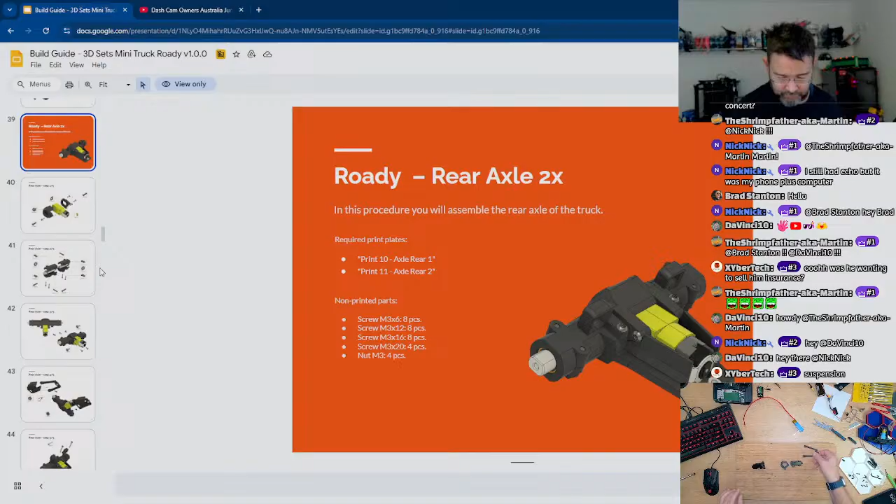Now let's just bring up that one for a moment, just showing you guys to make sure we're all on the same page. This wishbone, for lack of a better description, doesn't have this sticky outy bit on it. So that's what makes them different. Other than that, they're basically an identical build.

So let's go to here. And Chrome, there we go. You should be able to see top down, and you should be able to see me. Sooner or later I'll probably drag in the other camera, but I don't want to mess with it on stream because things then blow up. We know that goes that way up because I'm using the other one as a reference.

Now, I quickly put all this together off stream because we've already seen this, so I didn't want to slow things down any more than we had to with this part of the assembly process. Just making sure that the tongue on the motor fits into the tongue where the axle is, because the axle is already installed.

Next, we need to put the other half of the motor shell into place and screw it together. We need a whole bunch of M3x12s. Jecks is spamming because he wants number 1 apparently. 1, 2, 3, 4 M3x12s. And a screwdriver would probably be a good idea.

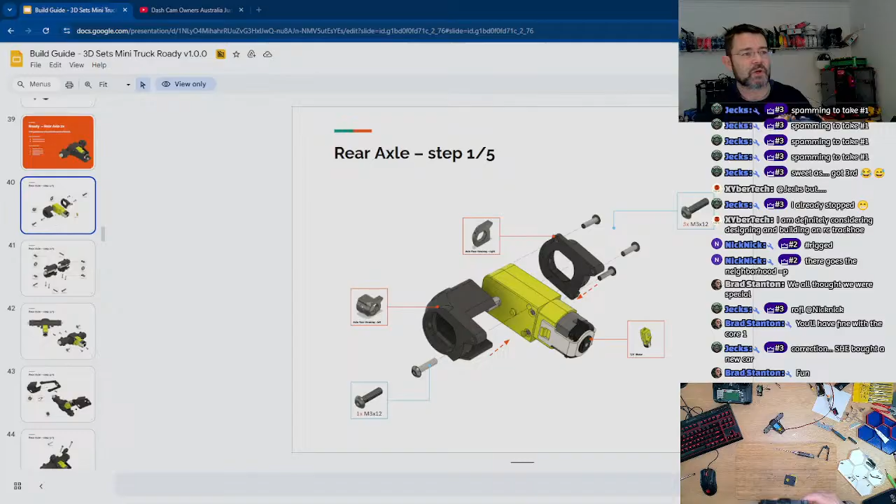Need that and that. So what's going on? I have these are the axles going through the middle that connect to the motor. I need to make sure that this housing is pushed in just as much as this housing, and it's an exceedingly tight fit because it needs to be.

So what I need to do is prop this up high enough and support it well enough to be able to really lean on it with a lot of weight and press it into place. That's not really going in as well as I would like.

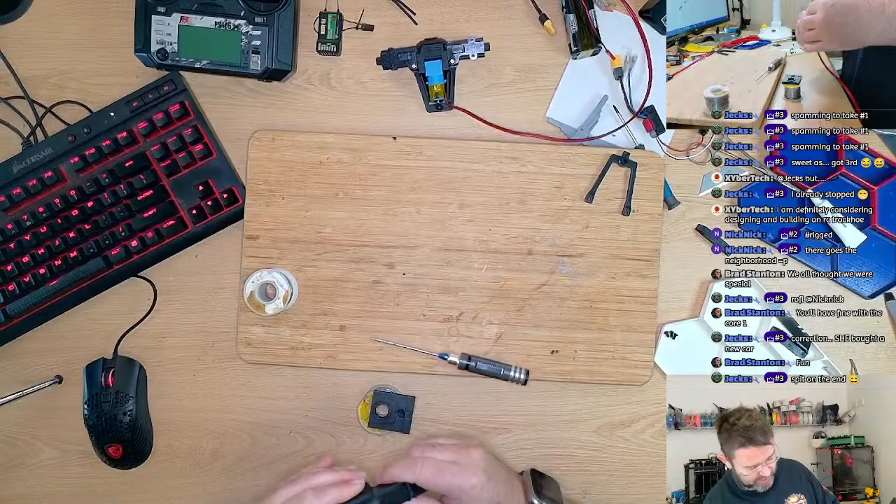I have another one of these printed out pieces I can use to whack it with. It's somewhere, I just have to go by hand for a minute. Let's move that out of the way. Making progress - this is the side that's being pressed in, that's the normal side.

Split on the end, dude! You can always spot the Aussies in chat, they'll be the crudest. And Jecks in particular will hold that standard for us, won't you Jecks? Yeah, Martin gets around Jecks, didn't you know that?

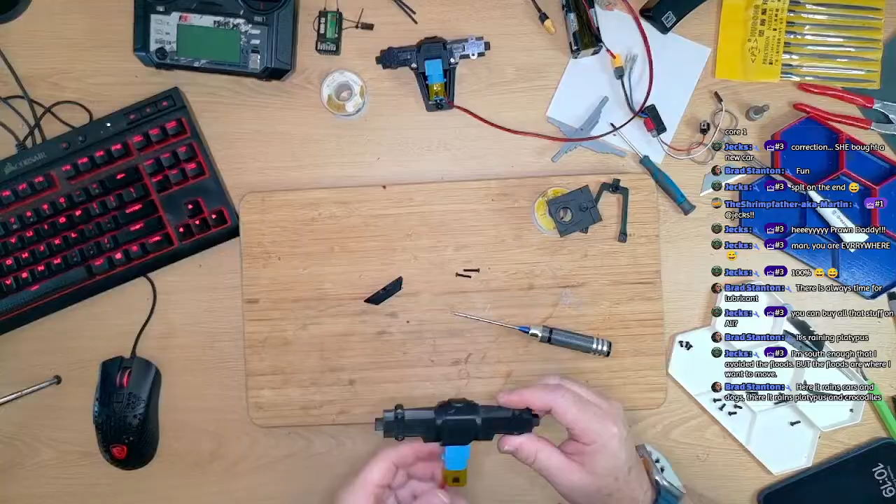Why would you want to move to a flood zone, Jecks? So just showing you guys, all 4 of the screws are in as per this, all M3x12 all the way around. Moving on to the next.

XyberTech, a lot of the stuff that's coming either today or tomorrow was ordered 6 days ago, so it's going to be 6 to 7 days delivery. And that's pretty much normal now.

So now we need a whole bunch of M3x6. One, two, another two. Put those in here.

Jecks, you obviously haven't ordered recently, man. Like, everybody's getting it in about a week.

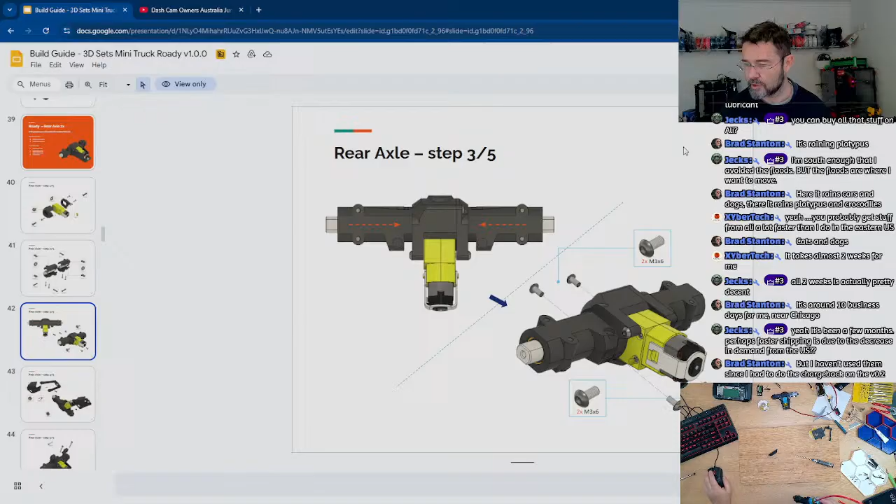There, so we have one, two, three, four of these M3x6s installed. Moving on to the next part.

Now we need the wishbone and we need the shroud. Where's the shroud? There's the shroud, and it's just pushing them into place, and we need those 2 nuts. And we remember the last time we were working on this, we said we were going to do 2 stainless nuts and 2 black nuts to help tell the difference, and they're there.

We can actually pop those nuts in after we put the wishbone in, so that's what we're going to do. So let's make sure we've got this the right way up.

I've just unsoldered the solder joint. I suspected it might happen.

Soldering iron is on and warming up. Rather than having to run out to the powder room, I've got myself a little bottle of water to top up the sponge with. Solder is right here.

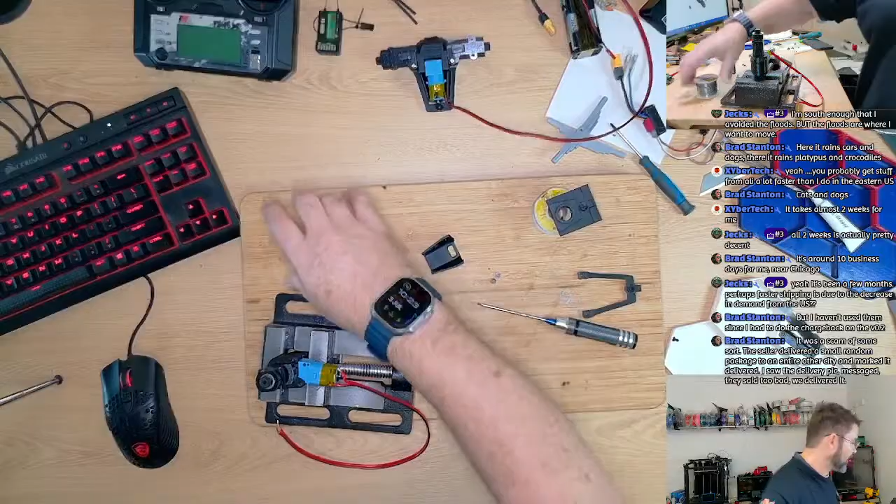Where are my little scissors? Hemostats? No, just razor blade, I think. So I'm just going to razor blade through the Kapton tape, or in this case, because it's the knockoff stuff, Cop10.

It looks like I was being a little bit too frugal with the solder on that joint anyway.

So soldering iron is coming up to temperature. You'll notice that I've now changed the way I've set up everything. Soldering iron is actually held off camera in a much safer spot where I'm a lot less likely to burn myself on it. So just pull that tab up a little bit, make it clear. Hemostat ready to hold the wire. And that's coming up to temperature.

I've never had that sort of experience with AliExpress, Brad. The one time I had a misdelivery, I took a photograph of the front of my house for them to compare against the delivery photograph, and they immediately refunded.

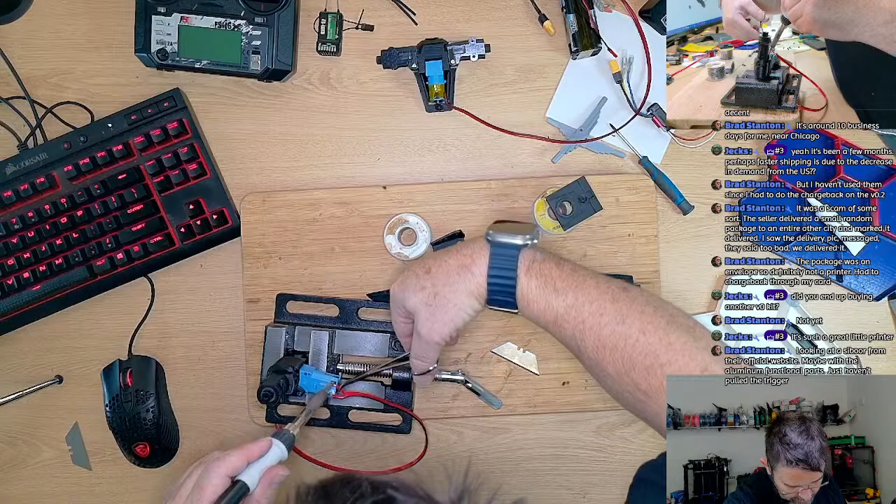That's better. Switch that off, put that there. Where did I put the Kapton tape?

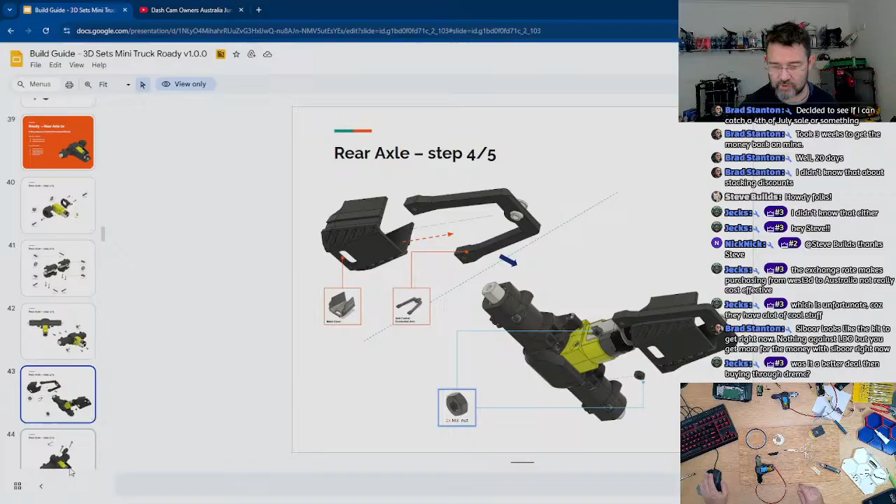Next is two M3x20s, which I keep over here. I already had one, so let's just go with that. If there's one in here, it probably means there's another on the floor somewhere.

The one, just going to your comment, Jecks, the comment I have about Siboor kits, amazing value for money, but the filament that they're using, it's either really good or really bad depending on the day of the week that they printed it or whatever's going on in that factory, because I had some parts on my V0 actually shatter, explode.

I mean, the best JST crimper I've got is the one that came in the Siboor V0.1 kit.

That's why I'm having difficulties. I'm like, why does this screw feel like it's about to bottom out? It's because I'm missing the suspension capture. So this part here is what I forgot to put into place.

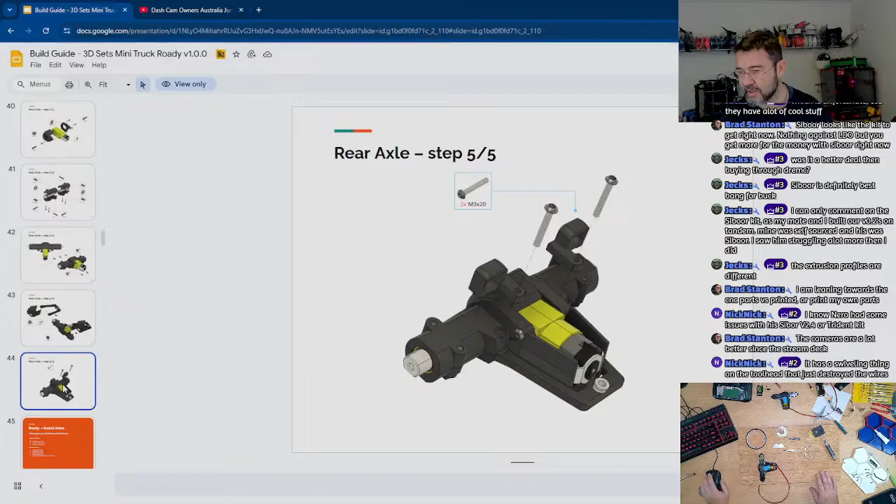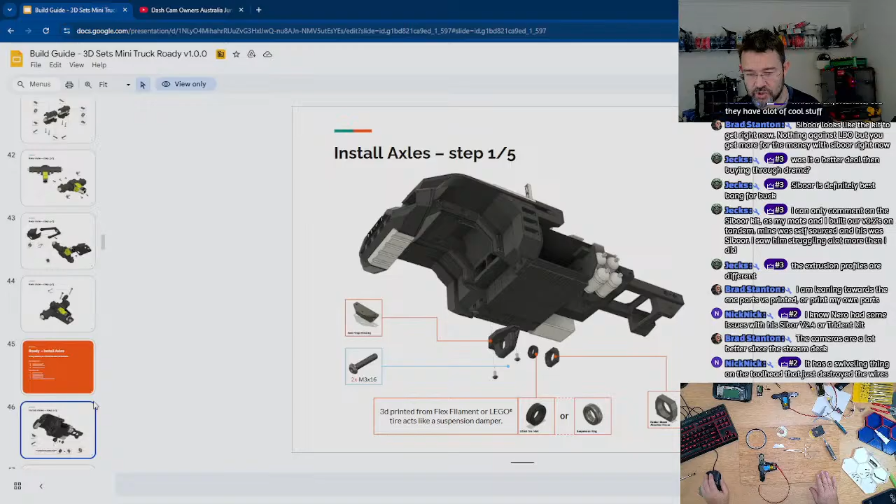So where are we at? Let's go here. We have the shrouds on. We have the suspension mounts and the screws in. Install the axles. Now we already did the front suspension, so we can skip through this. And we need to do, let's just make sure we've done all of that. Yes, that's all the front suspension. Now we need to fit these rear suspension blocks to the chassis.

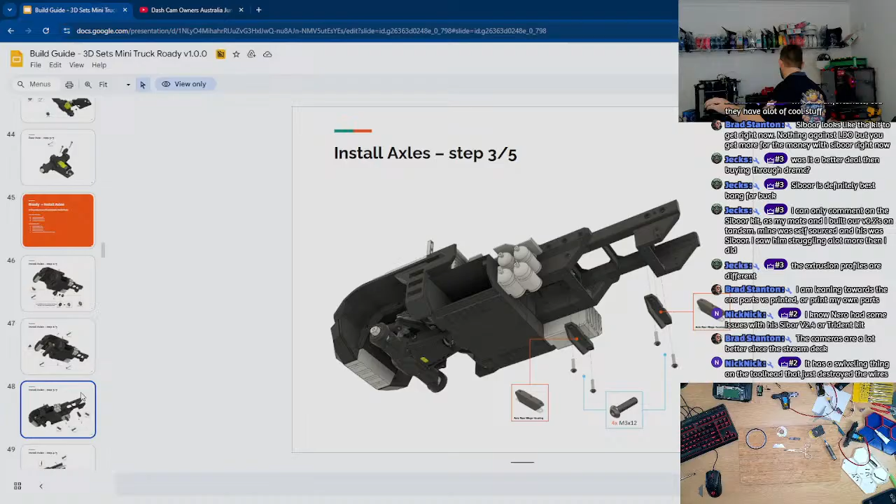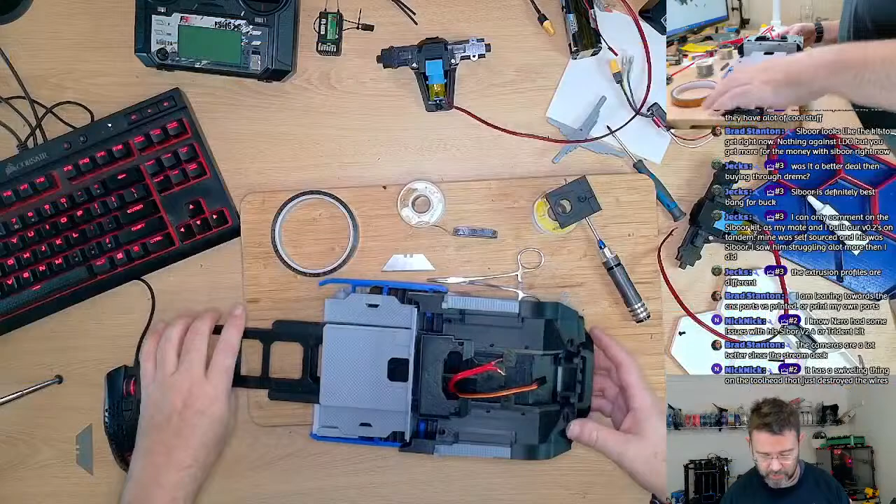So here we are. Off stream, I fished the wire out from the front suspension and pulled it through the right hole in the suspension. Next up, I'm assuming we need to feed all the wiring through and then mount the axles. Now, the instructions don't give any clear details on this part. The swiveling thing on the tool head that destroyed the wires.

Yeah, I was probably asleep for that part of the stream because when Taylor streams, it's the middle of the night my time. So if I do manage to make it onto a stream, it's usually in a stupor.

So let's have a look at this. M3x12, that's these guys. There's those guys. Mellow do some things really good. This is an M3 screw gauge. That's an M3x12.

And that just gets included at random when you occasionally order things. In my case, it was actually in the box with the Mellow board that came in my Siboor kit. Because like I said, when I got my kit, it was basically a bomb in a box kind of situation. They simply had got all the parts, stuffed them in a box, wrapped in expanding foam, and chucked in the mail.

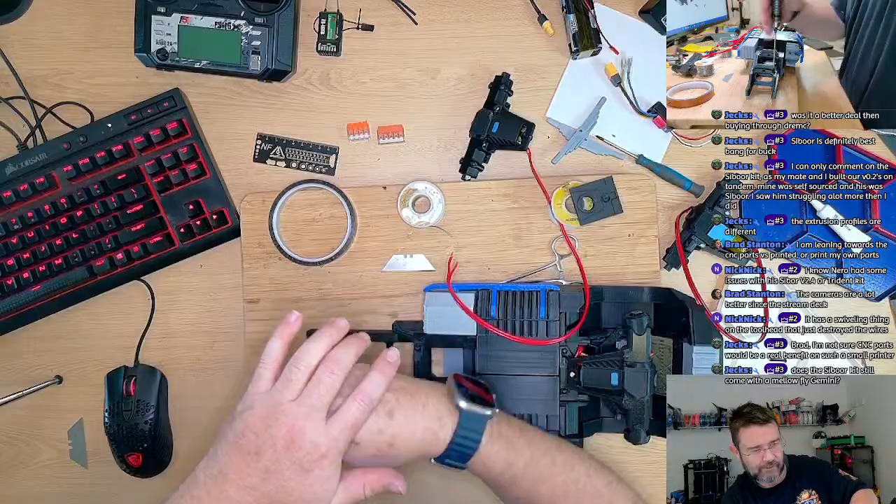I'm not sure what motherboard it comes with at the moment, Jecks. I got the Gemini 2 with mine because it was a V0.1. I got it on run out clearance for about $400 Australian, and at that stage that was cheaper than the motherboard, motors, and toolhead equipment. So it was well worth the buy.

Let's have a look at this. So where we're at, we have the damping pieces, I'm assuming. They're in place. We now need our leaf spring units, and we need to fit that. So it looks like that goes in first. Let's look at the huge logic loop we've got. We go from here to here, but there's no order of operations as to which way to do all this. My gut feeling is we fit the motor first, and then we fit the wishbone, and then we'll fit the rear axle components after.

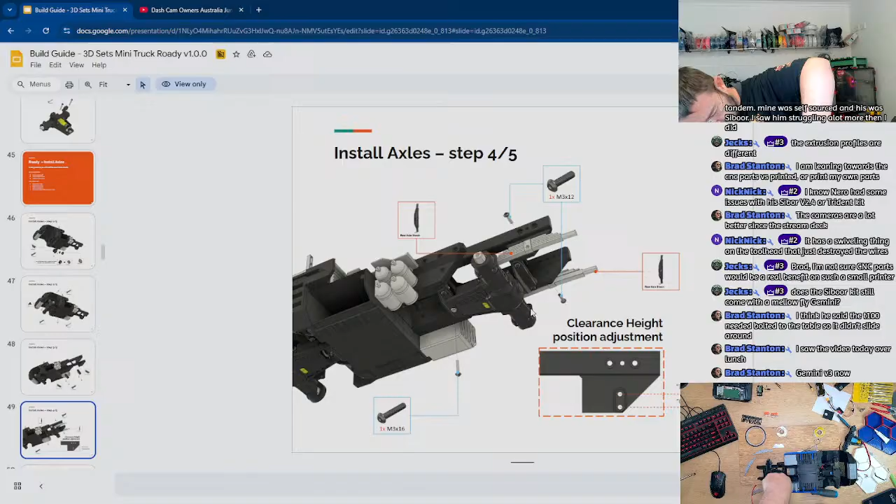So what I'm looking at is this piece of plastic is rubbing directly up against that plate. Maybe once the arms are in place, it'll all make more sense. Maybe it's just pushed far enough away that it's not a problem.

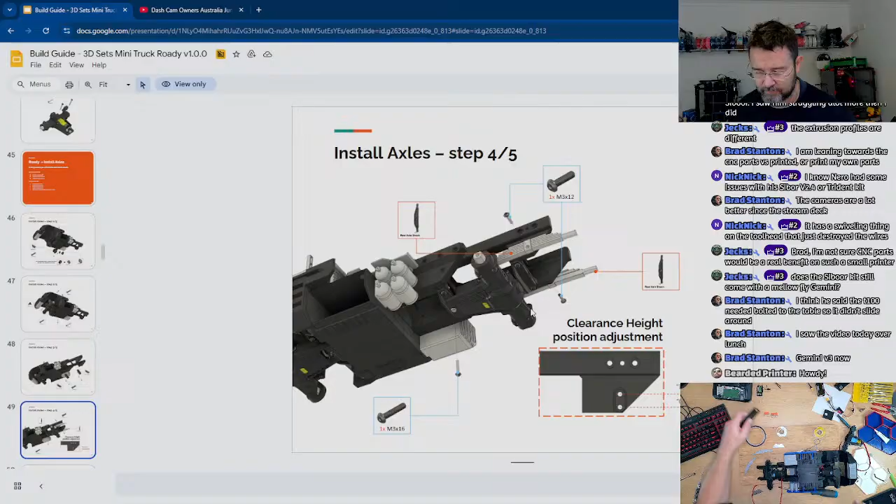So next we need to put in the wishbones on M3x12s. Is that a 12? That's a 12. So there's also a ride height confirmation. We need to put the screw into the lower half and the leaf goes that way. Screwdriver.

Beardy, how are you? I caught your CAD stream for a little while the other day.

Will I get better vision here? That's better, get rid of that big screwdriver.

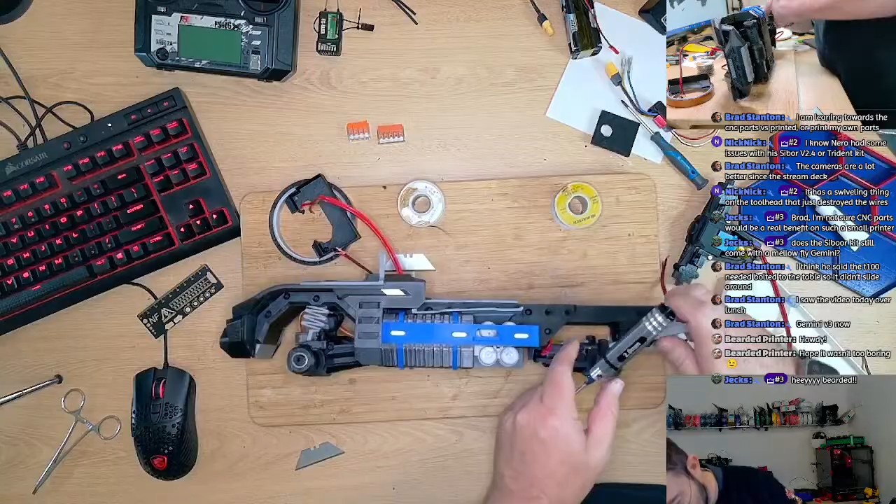Yeah, so going back to that discussion about vibration, the T100, I think he learned a lot from, and he's decided to embrace vibration and absorb vibration rather than just going for 'let's make this thing as rigid as possible and pray it doesn't resonate.' Which I think is going to confuse a lot of printer people, because a lot of people think the more rigid is more better. And I always point to the example of aircraft wings. Next time you're on an airline flight, have a look at the wingtips.

Ah, that's an M3x12 fill. M3x16 was through the ball joint. Like, why is the screw poking out the other side?

Here's the thing - let me finish my plane example. If you look at an airliner wing as it's taking off, you'll see the wings are hanging quite low. As you begin the takeoff roll, the wingtips will actually rise up, anything up to 3 or 4 feet higher than where they were sitting when unloaded. So as the aerodynamic forces take over, they lift the wingtip, and once all of the flex has been absorbed, that's what then lifts you off the ground.

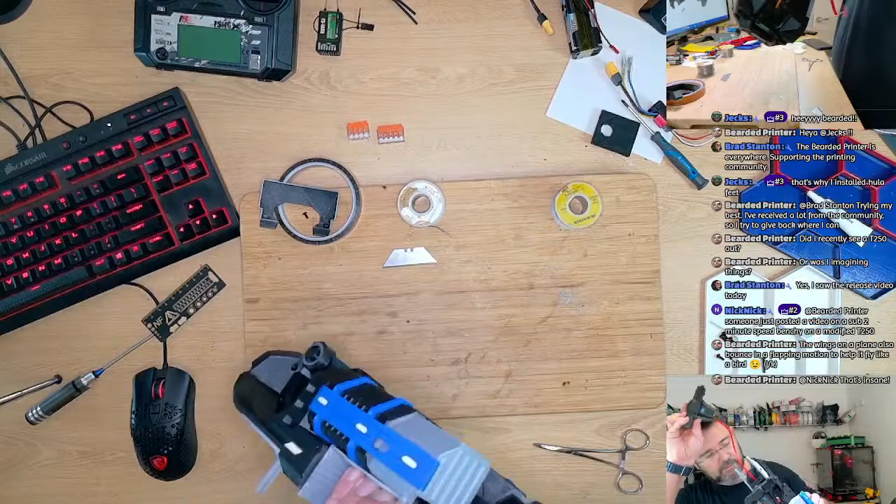Now, one thing I realized just before the stream started, and something that is going to be a bottleneck, means we can't get this actually driving today. I realized that I soldered the XT60 plug onto the battery pack, and it doesn't fit.

You have to solder that one after everything's put together. Okay, let's go back and have a look at this manual. Zoom in. It's the central one that has the tab.

All right, I'm an idiot. Fortunately, this is quite quickly recoverable. But how does that work? Because the tab then won't fit.

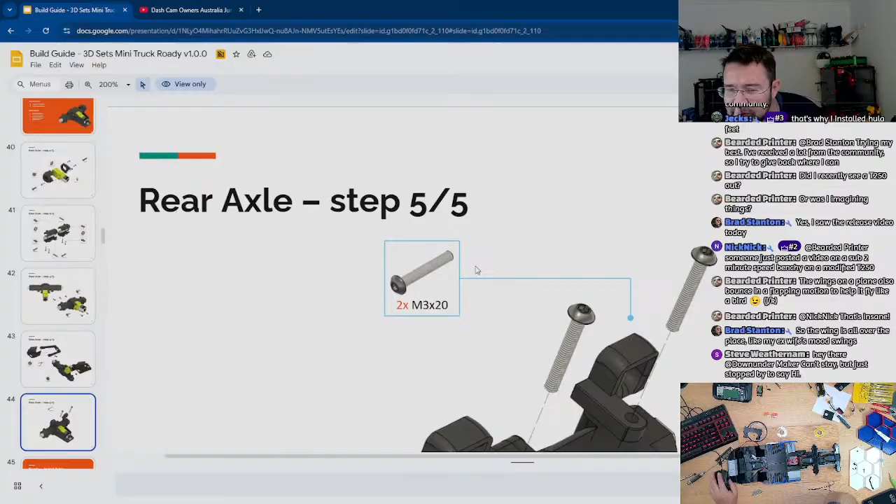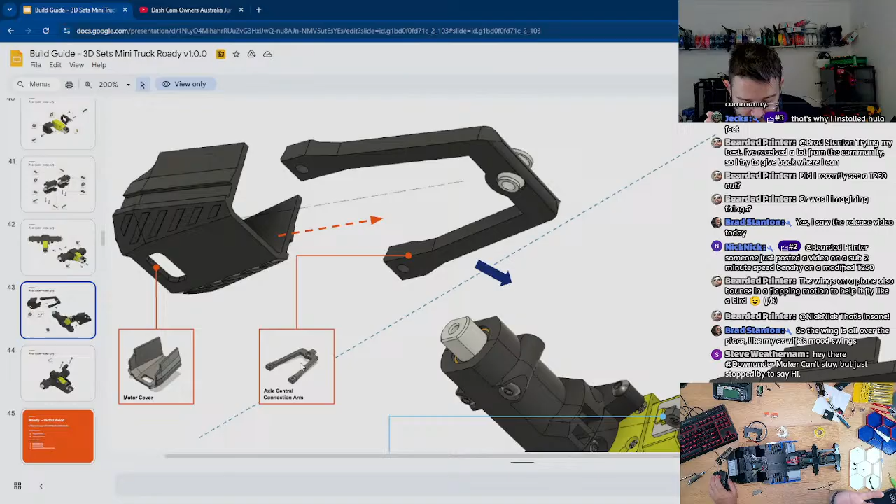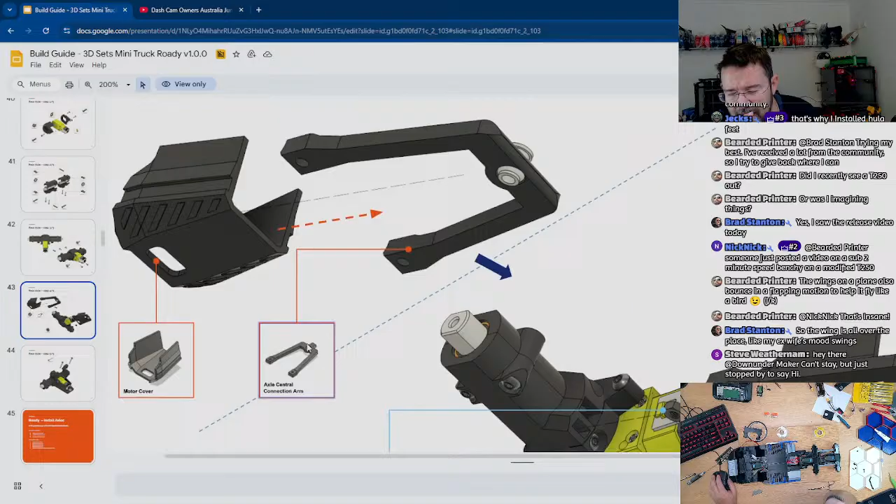Okay, let me go back to this manual so you guys can see. Central axle has the tab on. I've got them backwards - that's easily fixed, no big deal. But there's this tab, and that tab will prevent this all from being screwed together properly.

So let's have a clear look at this. You guys might not be able to see this. There we go - if we look here, no tab. Look here, no tab. Yet another inconsistency in this manual that makes my life difficult.

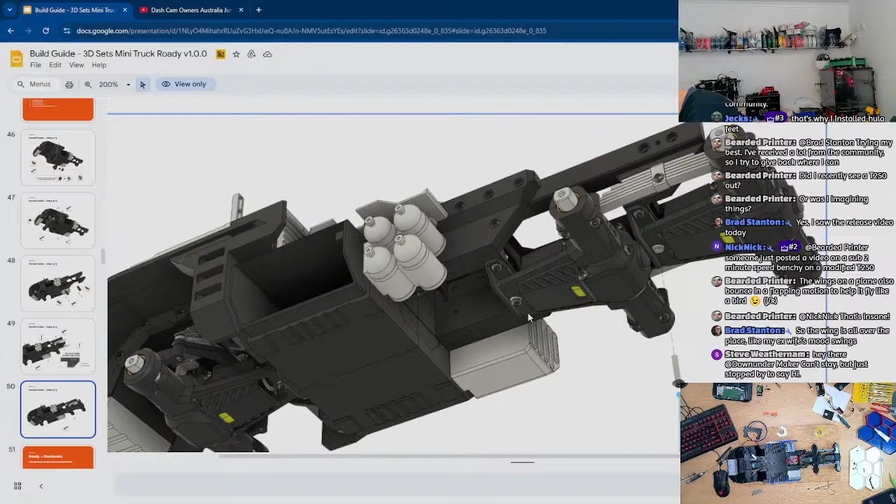It's the exact identical part - there's no slot in that part. And this wishbone is actually longer because it's identical to the front part. Do I have any spares? Yes, I do. Okay, so...

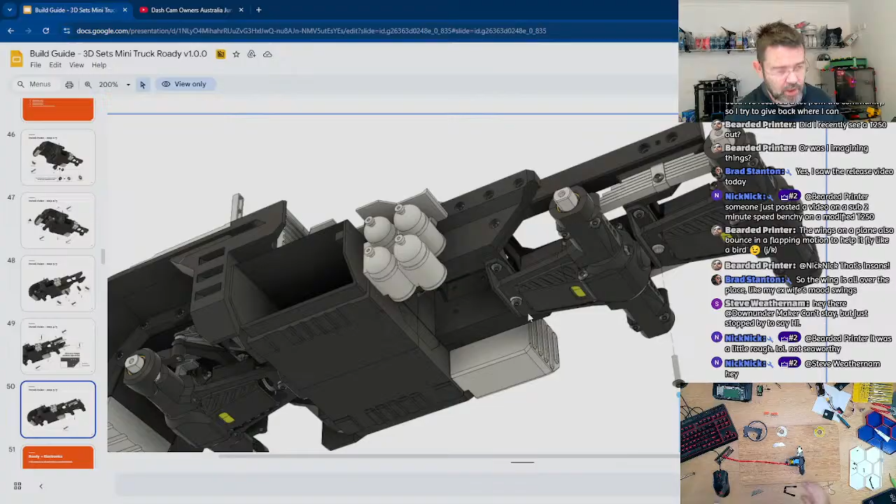Back to what we're going to do. The part with a tab on it - we're going to unscrew.

Hi, Steve. Other Steve, should I say? Steve with a W. Make sure you like.

I was actually hoping we'd have the suspension on by now and could start working on the cab. I mean, we're not that far behind, but it is irritating to have got to this point.

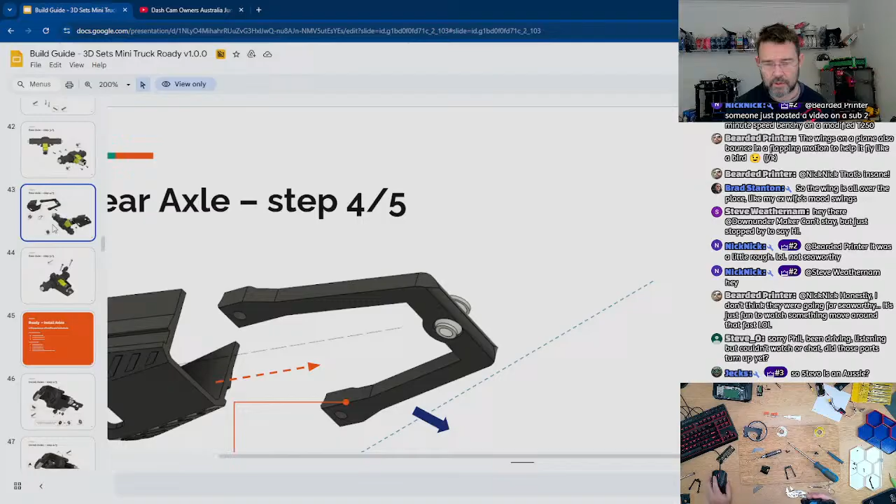So let's go back to here. It goes step side away from the nuts, so that way around. Yep, that fits.

And back on track, I think. Yeah, Jacks, Stevo is also on the Bogan server - top fella. He's another Perthy, except he lives on the wrong side of the river, on the north side.

So for the Americans, Ken Americans, Ken Mexicans and all the rest of you guys in the audience who aren't Aussies - Aussies are a little bit tribal. If you live in the wrong part of town, back in the day there wasn't that many river bridges over the Swan River in Perth. So you either knew people on the north side or the south side, because there were only really 3 bridge crossings. Until the 90s, when more bridges were built, it was very tribal, and that tribalism has kind of been kept.

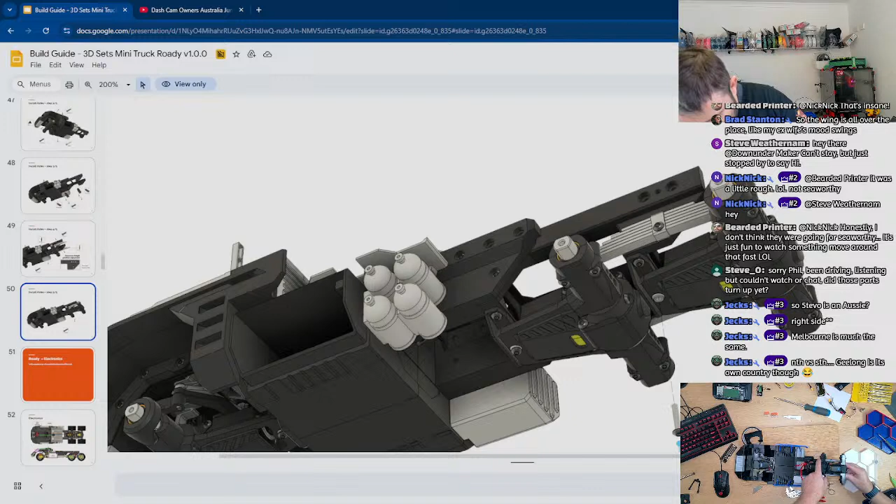So what I'm doing is threading the wishbone into the two loops that we mounted onto this suspension arm. I'm aligning the M3x16 screw with roughly where the hole is in the chassis to screw it to. Pre-drive the screw. Feel it start to skate, so now it's all the way through. I think I might need to open that hole up a little bit.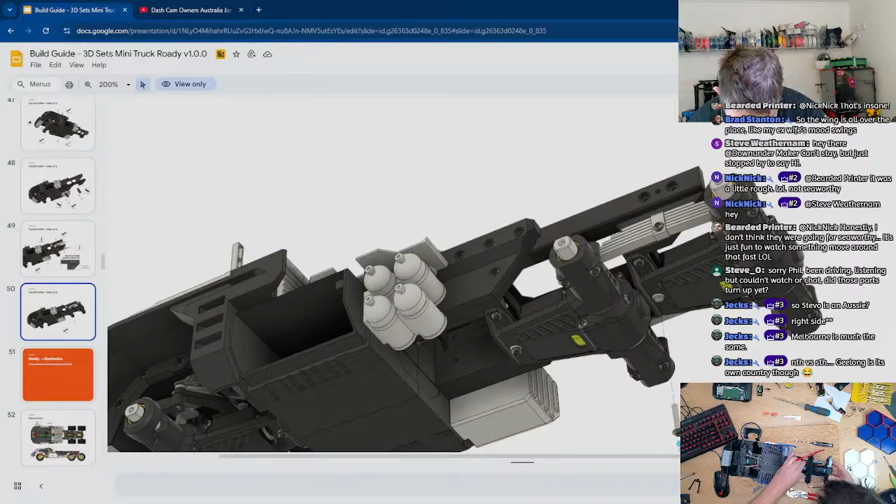I'm trying to think of a US city that we could compare to Geelong. Probably some backward yokel town that you guys would be familiar with wherever you live.

Right, that seems to work. Flip it over.

And we're done. Wiring is in place, motors are all mounted. That seems to articulate as I would expect it to. Let's zoom out a bit on this so we can see a bit better what's going on.

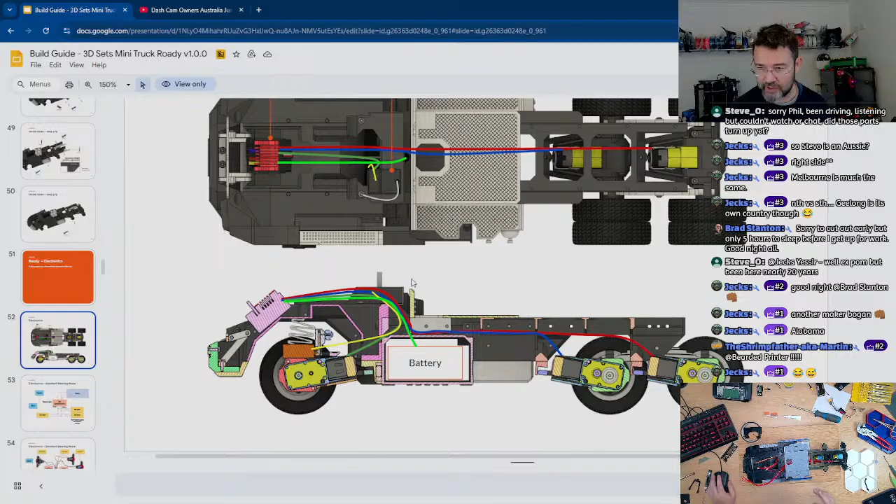Wheels, off-road wheels - we already have them made, so it's just a case of bolting them into place. It's M3x10s all the way around. That's those, and I have one, two, three, four, five, six, seven, eight, nine, ten by sheer fluke. Let's go that one. Now, let me just show you guys again for familiarity's sake - these are flat-sided round axles, so there's a flat and a flat that grab into the hub of the wheel. So it's just a case of lining that up.

So that's nice and snug. There.

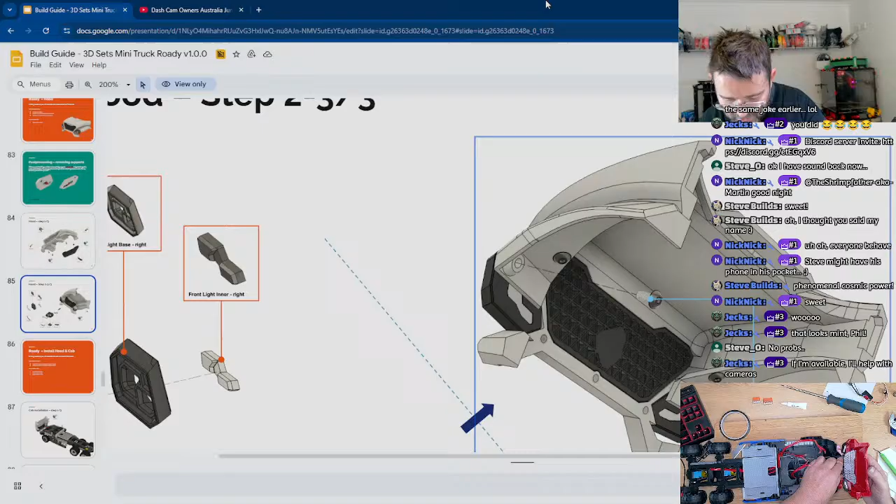So we have the hood in place and those screws have all stripped. Sigh, okay, not the end of the world. Leave it there, don't mess with it, Phil. What I would do is reprint that whole part and go from there. So let's put this over here, and now we can start working on the cab.

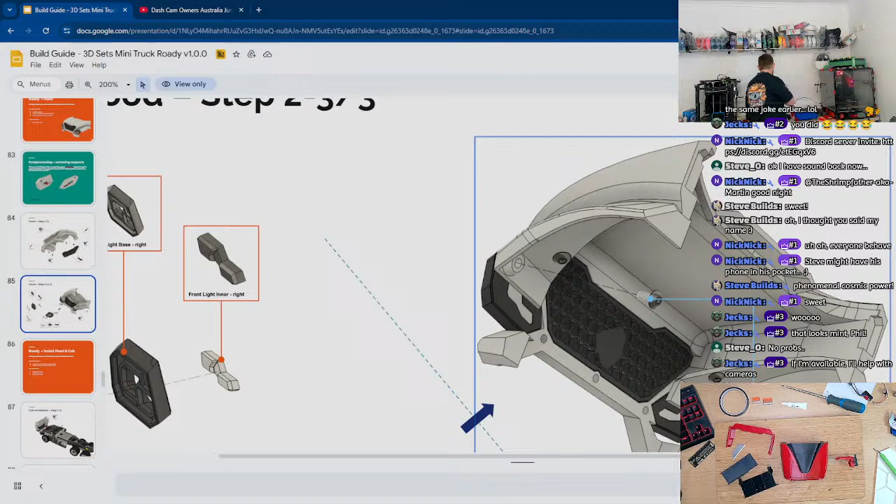I've done a couple of these parts ahead of time, either because they were brittle or because they were painful, just so you guys don't spend all your time watching me struggle. Okay, we did this part either last stream or the stream before - that's just the rear wall of the cab. Press this into place, we cut out the rear window, and we pressed in the surround. That's already done. Let's go back to the manual.

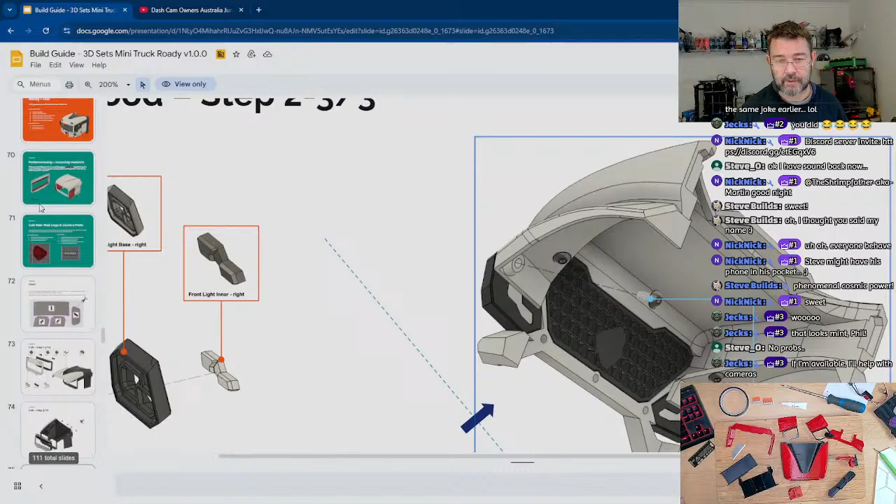Let's just go over this. This piece here is the main part of the window stay. There's a couple of support pieces you remove, and then this is the main part of the cab, and these support pieces get removed.

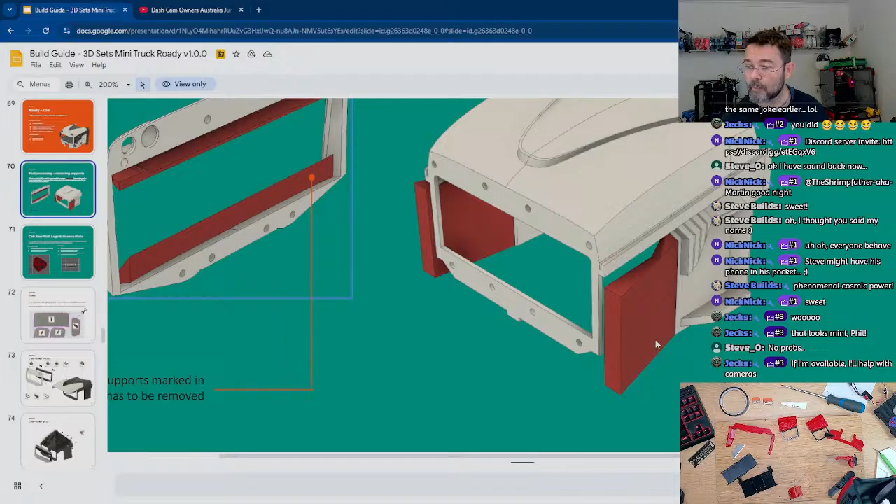These wings on the side of the cab - I had all sorts of strange issues in my slicing software. They just weren't being rendered by the slice engine. They were there in the pre-sliced image, but when the slicer came through and sliced them, non-existent. But that created a problem because the engine knew they were there, so I couldn't apply support material. It was a bizarre set of circumstances.

I ended up just hoping and praying that it would work, and yeah, I ended up with an okay finish on this particular version.

What I've done is I've already partially assembled the front windscreen because the clear window was getting scratched and damaged. So rather than allow that to keep happening, it was better to just put it into place. We already have the window in place here, and we just need to finish putting all the screws in that hold it.

I've already installed the top part of the cab. It's an interference fit, but not a good one - I don't know why it's not fitting very well. It should, it's just not. Maybe I need to reprint all these parts at some later stage, but right about now I just want to keep going and get this truck finished.

So that's all the window infrastructure in place, and we're going to need to take some of this apart a little to put the... wait a minute, how are you supposed to be able to do that? Because some of those are screwed. Yeah, we're going to have to take it apart anyway - screwdriver. If nothing else, having partially assembled it means it protected the windscreen a little.

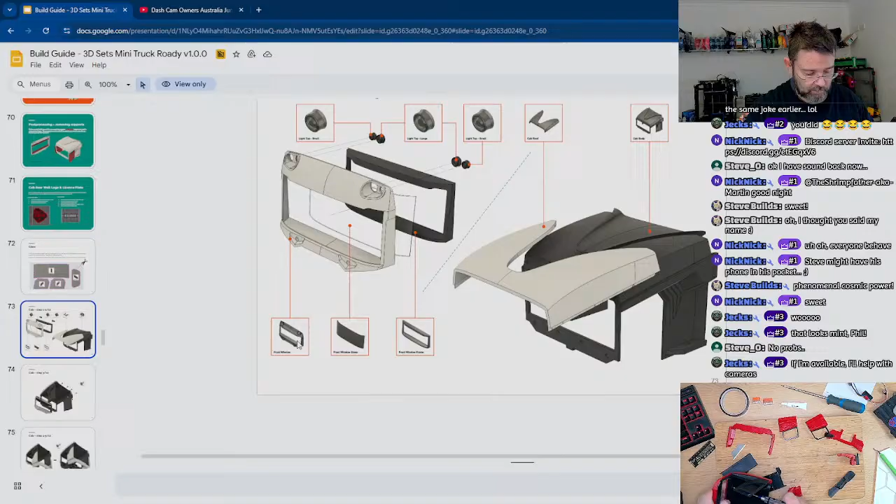Sorry, let's go to that one. So I've got one screw in at the top. I'm going to put a screw in at the bottom just to keep it all square and held together, and then we'll work out what other screws we need to put through.

So there we are, all right. All M3x6s all the way around.

I was kind of hoping that the AliExpress delivery would come during the stream so we could have a quick look at a few of the things I've got. I've bought myself a new tool organizer because, as you can see, I've got everything everywhere and it's kind of working, but it's just not organized. It's driving me a little bit insane, putting things down and then not being able to find them again.

One, two, at the bottom in the middle, and then 4 across the top.

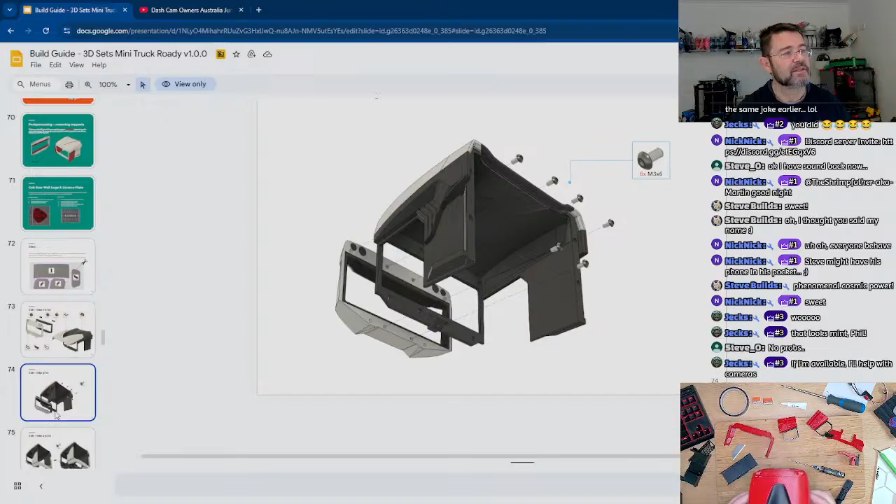That's not quite as snug as it should be. Oh, that's the misalignment of the roof panel. It's got a panel gap like a Tesla at this point, but I can tweak that. I'm going to tweak that off stream and keep building, I think.

So, next stage. Next stage is the floor pan and the rear half of the back. It says to do that part first. That all goes in nicely, and that needs an M3x8, an M3x6 on the bottom.

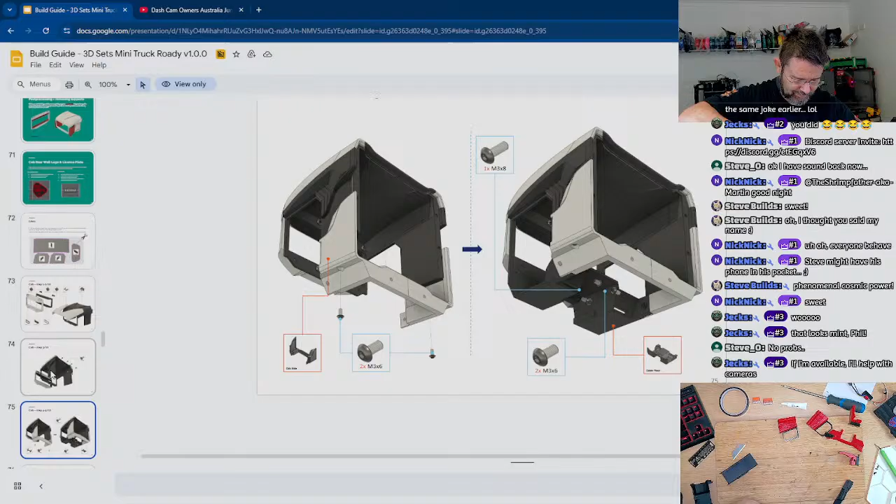So I'm being very, very gentle here, guys, because this is carefully and gently easing the two panels into alignment with each other.

And that's on. Now we need the floor of the cab, which is two more M3x6s there, and an M3x8 up through the middle. I'm going to do the M3x8 up through the middle first, I think.

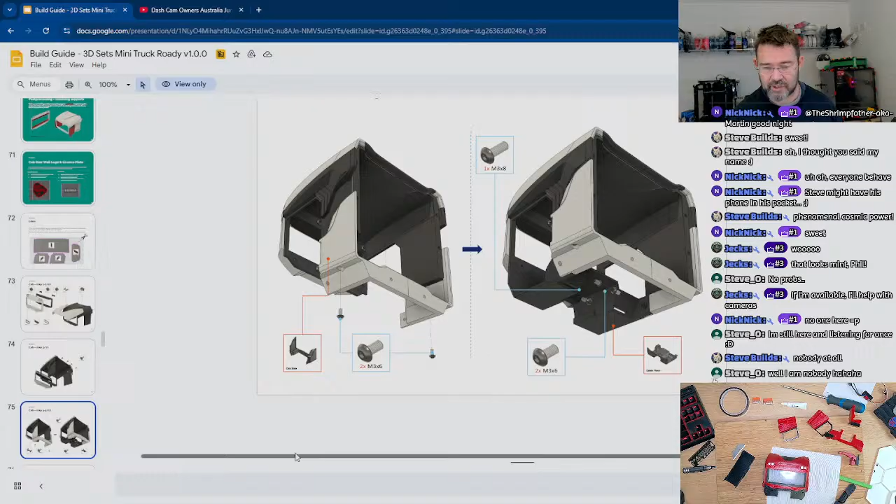So we can move on to the next slide. We need four M3x6s and two M3x8s. We need two more M3x6s, two M3x8s, and we need the mirror pieces.

So the mirror gets sandwiched between the parts like this. And then the M3x8s are the... no, M3x8's the outer two.

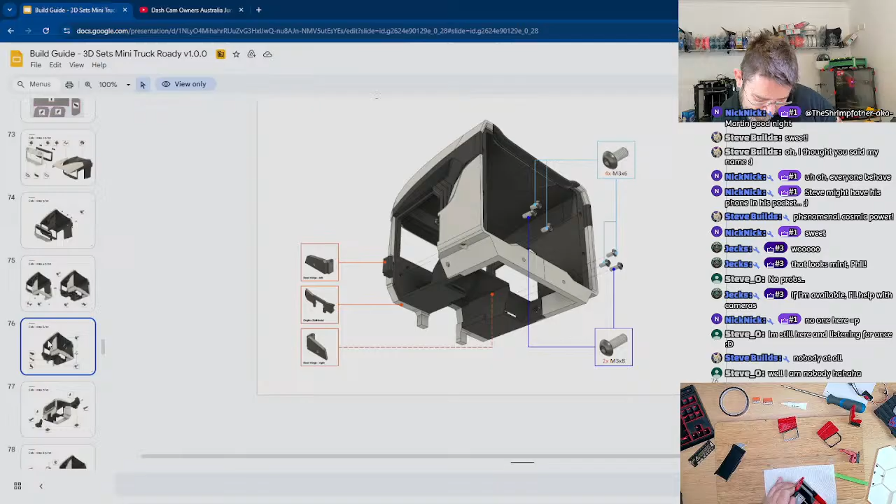Show you guys what I can see. Next, we need those M3x6s. So they go just above. There must be some there. That's it.

Sorry, I know I've gone quiet and there's a bit of dead air at this point, just concentrating. Last of these screws for this page going in now.

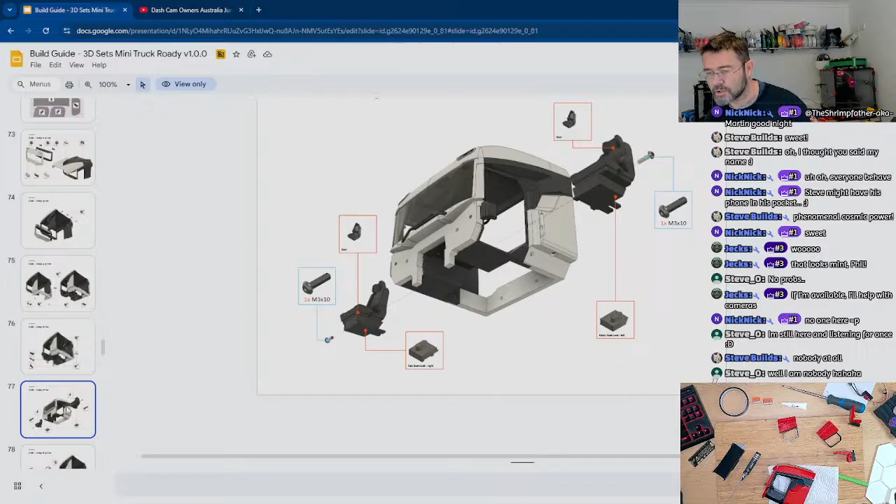Just M3x10s through the base. Now, I've already put the base and the chair together because they were a very, very tight fit and needed a little fettling to get them to go together.

Now, it goes in from the outside, which is away from those tabs. So the base has the tabs offset to one side and the screw goes in on the opposite side.

Just need a little persuasion to get that screw hole started. Again, screw on the opposite side to the tabs. There we go. Two chairs on two bases.

Next page. Oh, apparently you install the chairs, but how?

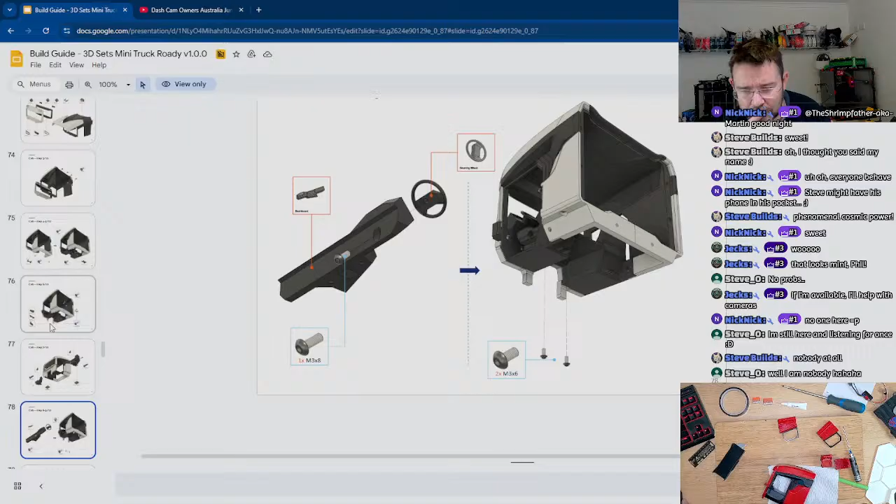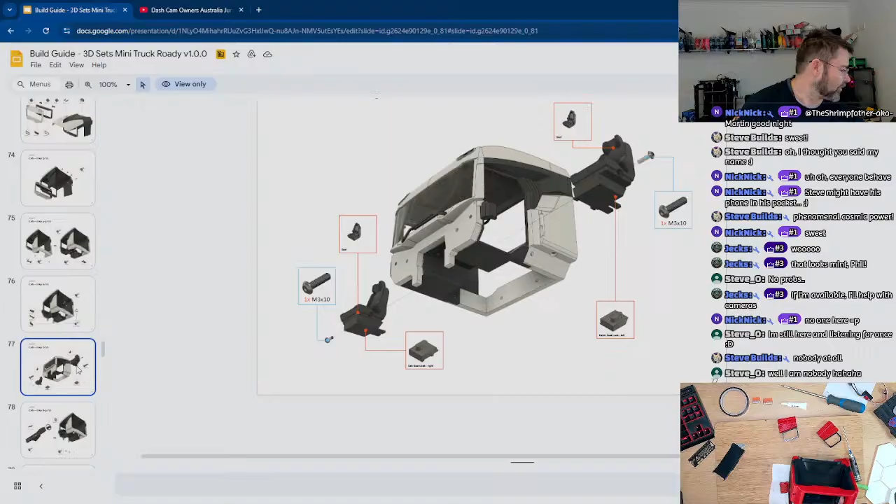Ah, now let's see if I can show you this. In the floor, there's these little grooves, and the seat base. It's supposed to pop into there.

It's not fitting. I think there's just a little bit of quite average bridging going on in there. And that's sliding in nicely.

That'll probably work a lot better. Sorry, I know it's off screen. Let's broaden out a little bit.

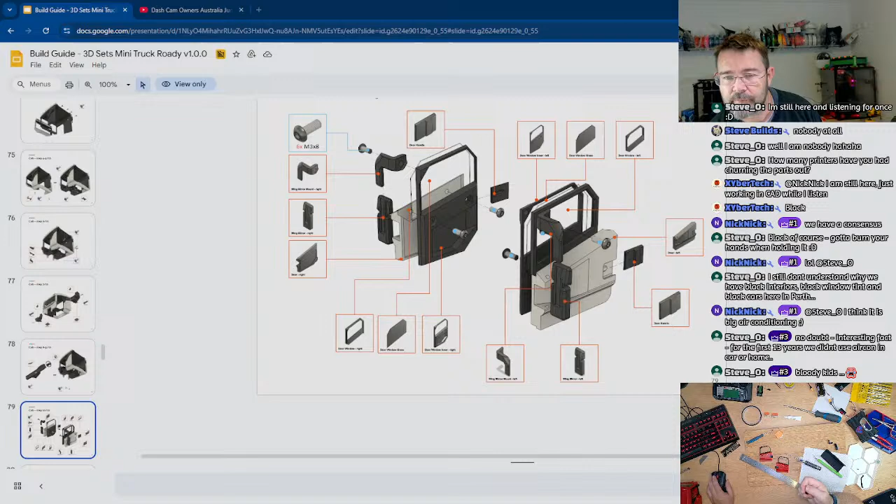So let's go back to the manual just to point this out. What we're dealing with is this piece here. There's a very small tongue and groove kind of situation for sliding those two pieces together.

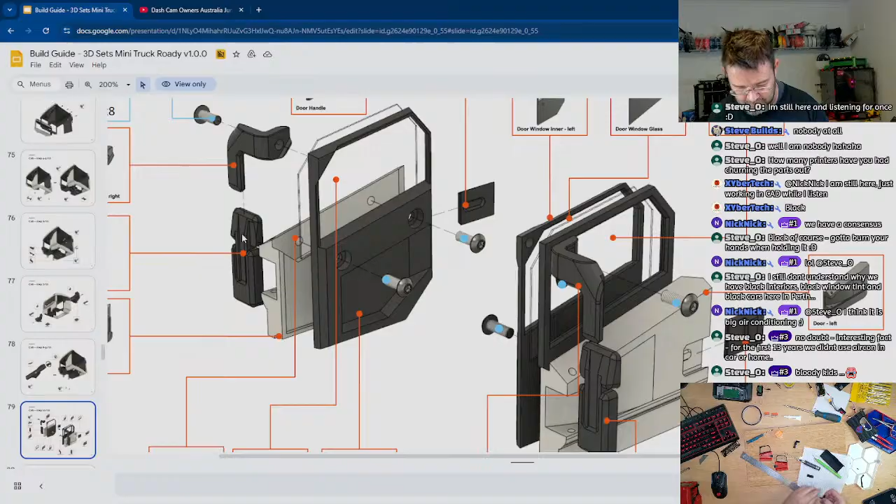And this is really, really difficult. There we go, that's started to slide in. Done, it just suddenly decided it wanted to find its home.

And so is that one. Huh. Just needed me to pay a bit more attention, I think. Okay, so, mirrors.

I am tempted to cut a little bit of foil to put into what should be the mirror surface, but that'll be for another day. So M3x8 through the top of that.

And we are 20 minutes after the end of my normal window, so I think what we'll do is as soon as I've got these mirrors attached, we'll call it, and we will then attach the doors next week and maybe start on the cab, depending on how things are playing out and if it gets delivered in time for the stream. So that's the other door.